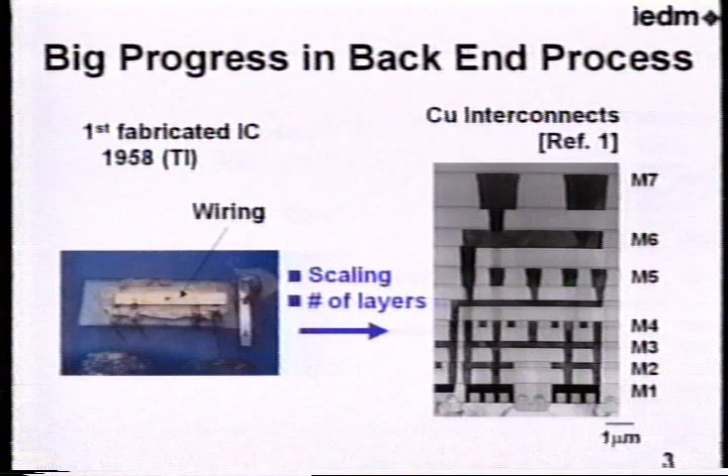This picture shows the first fabricated IC by TI in 1958. It's somewhat difficult to see where the wiring is, but you can see this wiring between the devices in the first IC chip. And this picture corresponds to present day copper low-K interconnects. As you can see from these figures, there is a drastic change in device structure over these 50 years, like a half century.

And the changes have occurred mainly in two areas. One is that the scaling of interconnect has drastically shrunk. And the other is that the number of interconnect layers has drastically increased. I'll explain this change in more detail. This figure corresponds to a multi-level interconnect in logic LSI from 0.5 micron to 0.18 micron technological node.

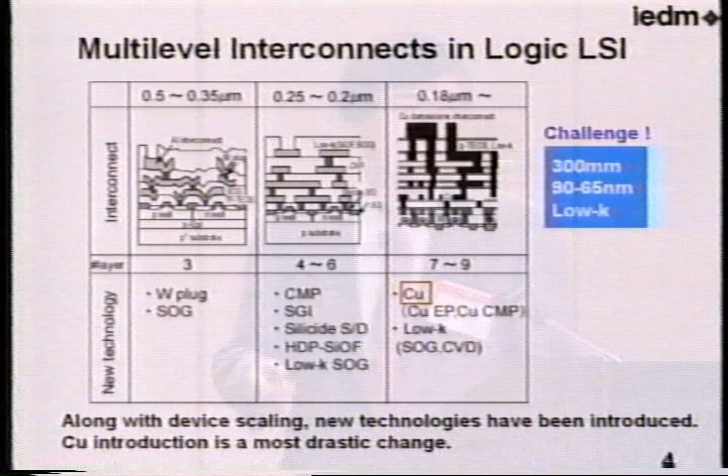As you can see in this figure, along with the device scaling, new technologies have been introduced at every technological node. There are many new technologies like this. If I explained these new technologies in detail, maybe I could conclude my talk in 6 minutes or so. But among these, the introduction of copper is the most drastic one. And now we are facing the new challenge for 300 millimeter and the 90 to 65 nanometer technological node, and the special challenge is low-K introduction.

Copper is drastic because the process of copper is completely different from the aluminum one. Copper is formed by using the so-called dual damascene method. In the damascene process, the interconnect pattern is initially formed in the oxide, and copper electroplating filling and copper CMP follow. Damascene process consists of single damascene and dual damascene process. And in manufacturing, the dual damascene process has been widely used because of fewer process steps.

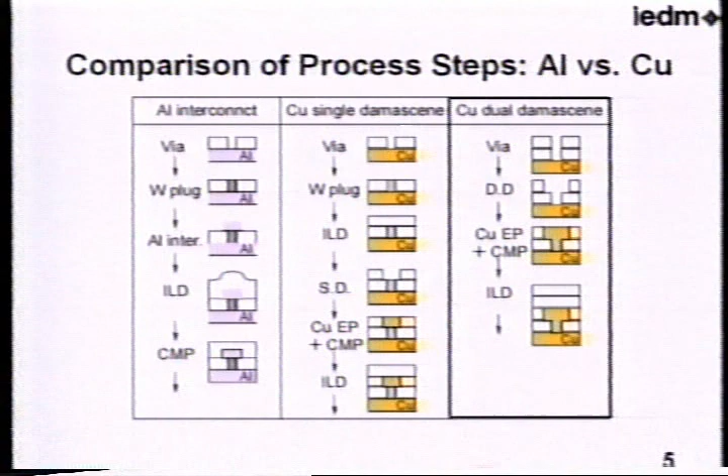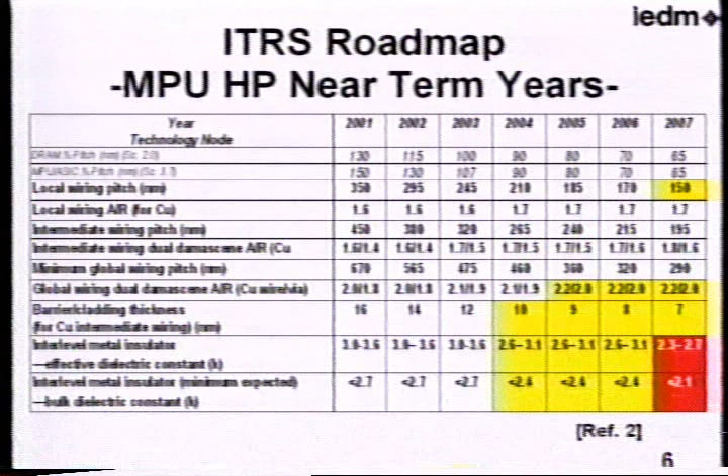This is the ITRS roadmap of 2001. As for the scaling of interconnect, it is indicated for each layer. This is local wiring, intermediate wiring, and global wiring. And also, the scaling of barrier metal thickness is indicated like this to suppress the increase of copper resistivity. And as you can see, for the introduction of low-K, you can see the red bricks here. That is standing in the way to develop a 65 nanometer technological node.

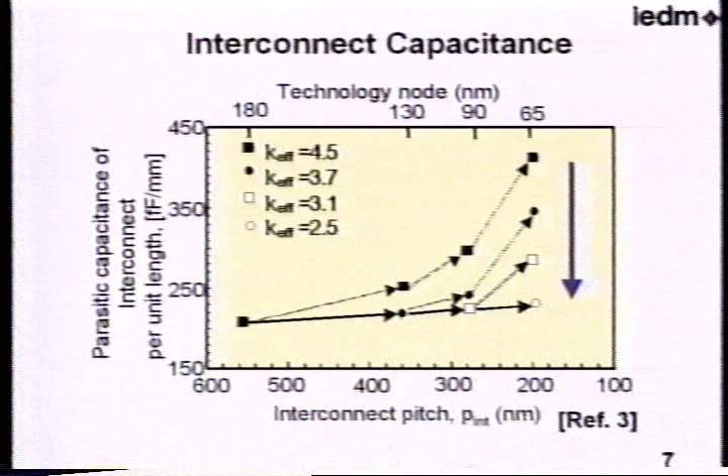This figure shows the interconnect parasitic capacitance with the interconnect pitch. In the 0.180 micron technological node, we use SiO2 ILD. In that case, K effective is 4.5. But in this case, with scaling interconnect pitch, parasitic capacitance of interconnect is drastically increased beyond the 90 nanometer technological node.

That's why we introduced the low-K. For example, for the 130 nanometer technological node, the K effective is 3.7. For 90 nanometer, we'll use the low-K with the K effective 3.1, and for 65, K effective 2.5. These values are almost consistent with the roadmap values. To adopt these kinds of low-K, we can make the interconnect capacitance almost constant for every interconnect pitch.

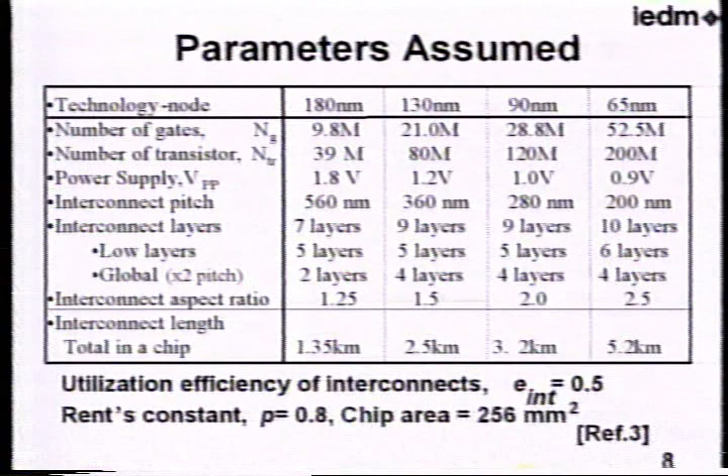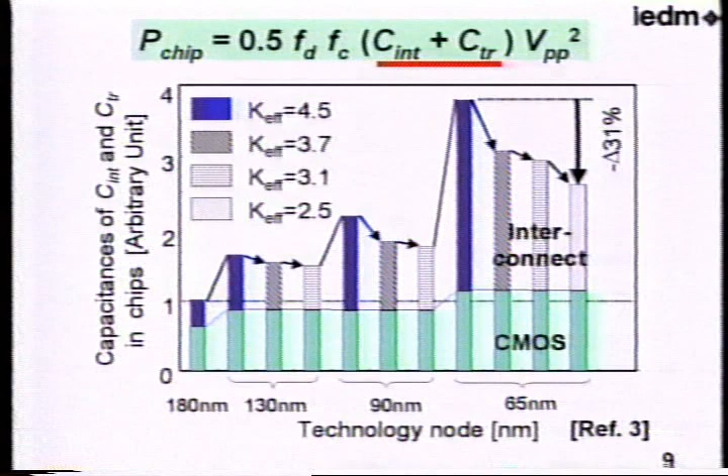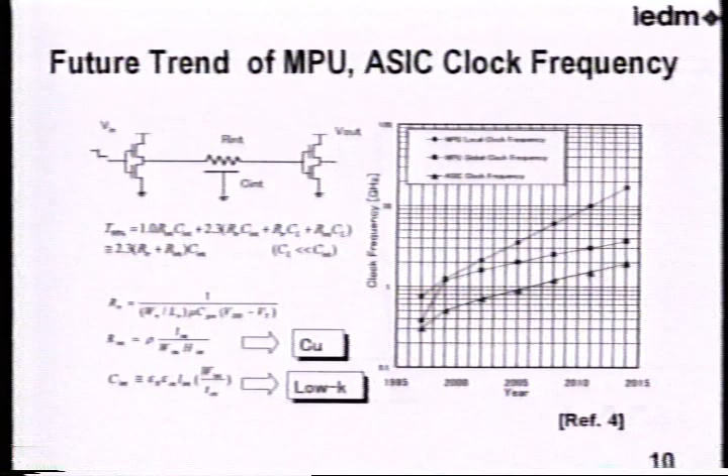Also, low K introduction is very important to reduce our RC delay. This figure shows the change of clock frequency by year. Local clock frequency of MPU is increasing rapidly like this, but the increase of global clock frequency is slow as compared with the local clock frequency due to the RC delay expressed by these expressions. Along with the low K introduction, reverse scaling of global wiring is expected to meet the high-speed operation requirement.

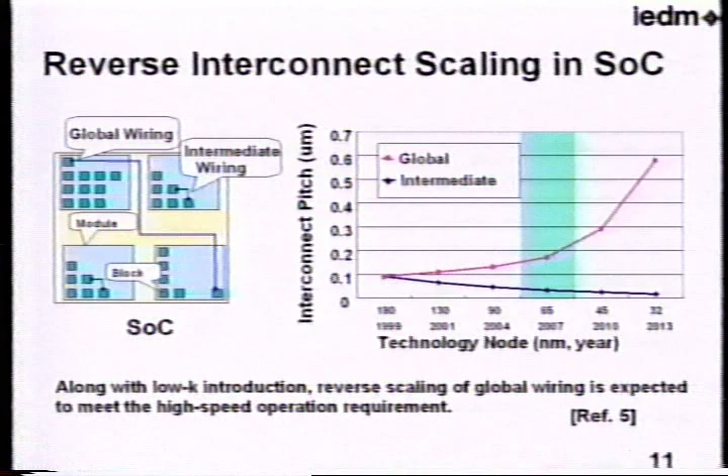This figure represents interconnect pitch versus technological node. The interconnects are divided in 3 categories. One is block wiring, and intermediate wiring connecting blocks, and global wiring connecting modules. The pitch of intermediate wiring is scaled like this. However, the pitch of the global wiring is increased drastically beyond 65 nanometer technological node. This means also the number of interconnect layers will be much increased to meet the high-speed operation requirement.

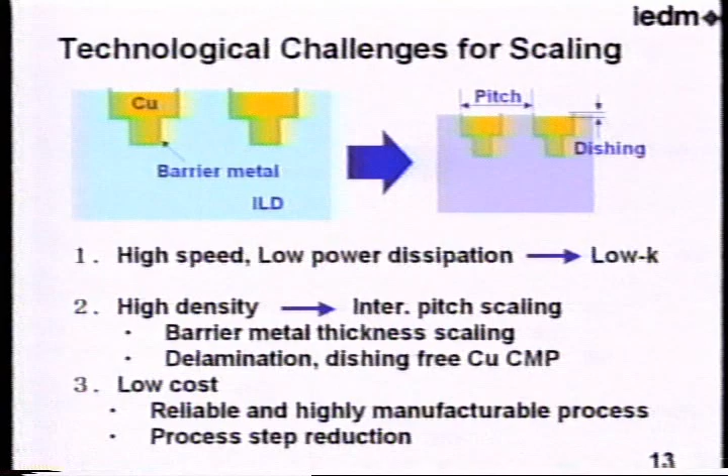Next, I'll talk about technology challenges for 65 nanometer back-end process. This figure represents the three main technological challenges for scaling. One is the low K, that I described earlier, for high speed and low power dissipation. The other one is for high density integration. For interconnect pitch scaling, barrier metal thickness scaling, and also dishing-free Cu CMP is very important to suppress the distribution of the interconnect resistance in the wafer. And cost is a very important factor for metallization, and cost determines the process, and a reliable and highly manufacturable process is required.

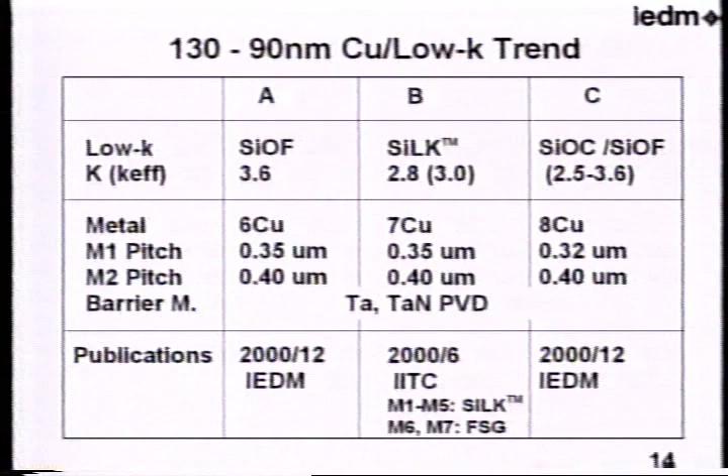As for 130 to 90 nanometer Cu low K, there are many candidates for low K material: fluorine doped SiO2, in this case the K value is 3.6, and also SiLK, which is an organic polymer, and also carbon doped SiO2 have been widely investigated for these applications. As for the barrier metals, PVD of tantalum-based metal has been widely used.

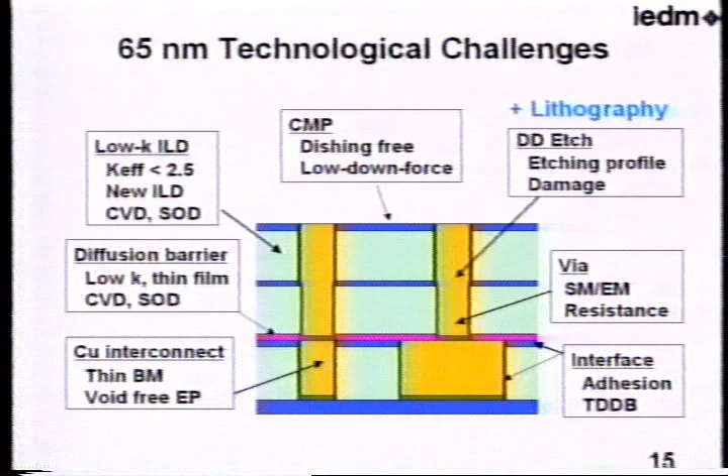This figure shows the 65 nanometer technological challenges. The first one is low K ILD, as I mentioned earlier, and the diffusion barrier that is put on the insulator above ILD to reduce the effective K values. The selection of low K thin diffusion barrier is very important. And also for interconnect scaling, thin and conformal barrier metal is needed, and void-free electroplating technology should be developed to guarantee the reliability. As for the CMP, a dishing-free process, and also to prevent the delamination or the damage of ILD, a low downforce process will be needed.

As for the dry etching, precise control of etching profile and also a damageless process to ILD is needed. In addition, the compatibility of lithography is very important. As for the via formation, the reliability of stress migration and electromigration is very important. To improve this kind of reliability problem, the interface property like adhesion is very important.

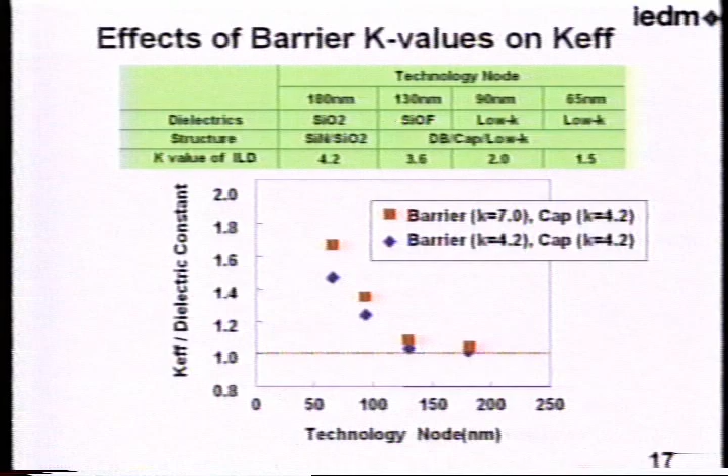The effect of barrier K value is very drastic, as shown in this figure. We assume the interconnect structure like this. As for the dielectric, at 180 nanometer it is SiO2, and in this case, the structure is nitride and SiO2. K value is 4.2, and at 65 nanometer, low K value is 1.5, with diffusion barrier and cap of low K. We use this structure, and this is the result of the calculation. The vertical axis represents K effective divided by the dielectric constant of ILD. This means below a 90 nanometer technological node, the effect of the K value of diffusion barrier and the capping layer is very important because of the big difference between normalized values.

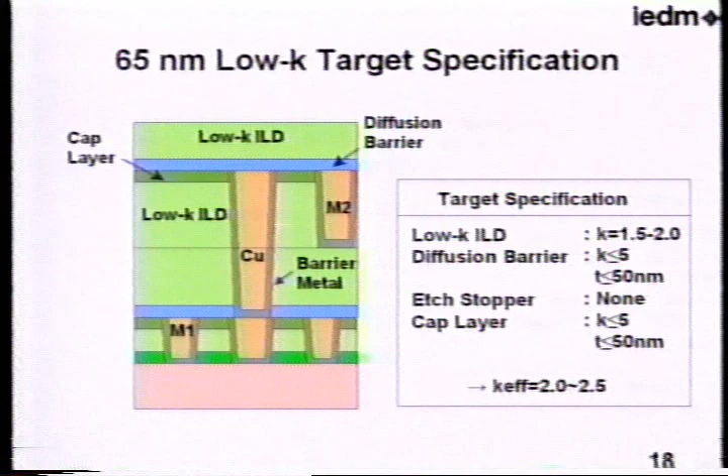I'll summarize the target specification for 65 nanometer from these calculations. This is an example of target specification. For the low-K ILD, the K value ranged from 1.5 to 2.0. For the diffusion barrier, the K value is less than 5. In this case, an etching stopper is not used. And there are similar conditions for the capping layer that will reduce the K effective value from 2.0 to 2.5.

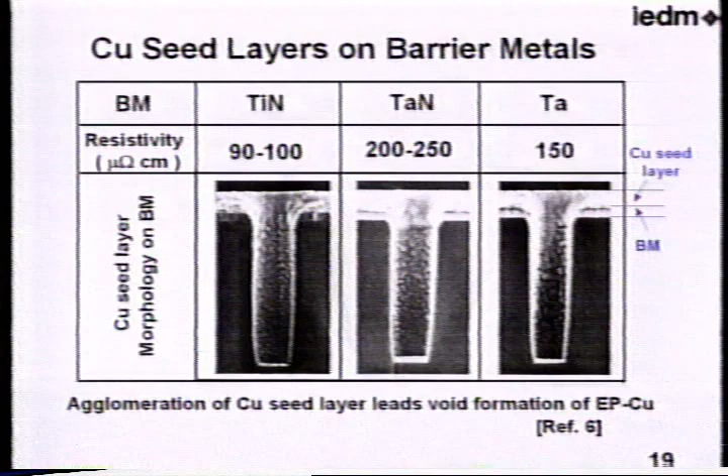I'll move to the topic of metallization, the barrier metal. This picture shows various copper seed layers deposited on various barrier metals: titanium nitride, tantalum nitride, and tantalum. All the deposition was conducted using PVD. As you can see, there is agglomeration of the copper seed layer on the side wall, and that will induce some voids when the electroplating process is conducted. Thus, a conformal and thin diffusion barrier is very important. Also, the selection of barrier metal is very important in terms of reliability via thermal stability.

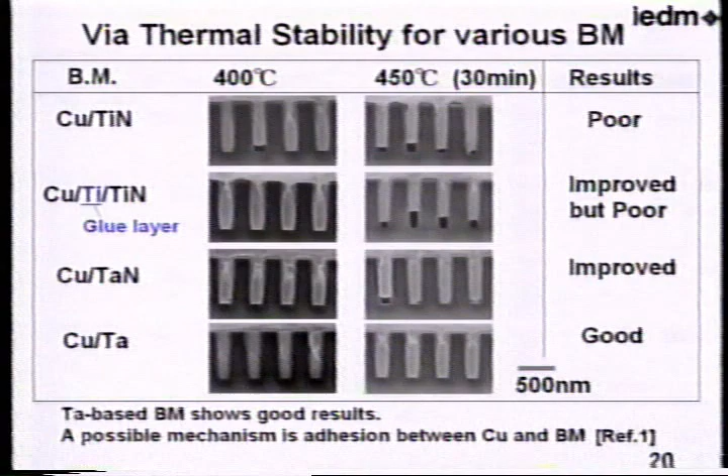These are some pictures after annealing at 400 to 450 degrees C for 30 minutes. These are the barrier structures. As for the copper titanium nitride, you can see the void after thermal treatment. And if we put titanium between the copper, as a glue layer, things are improved. But basically, if we use a tantalum-based metal, this kind of stability is much improved. A possible mechanism is adhesion between the copper and barrier metals. So the selection of barrier metal is very important, and we should also make much effort to develop conformal and thin film formations.

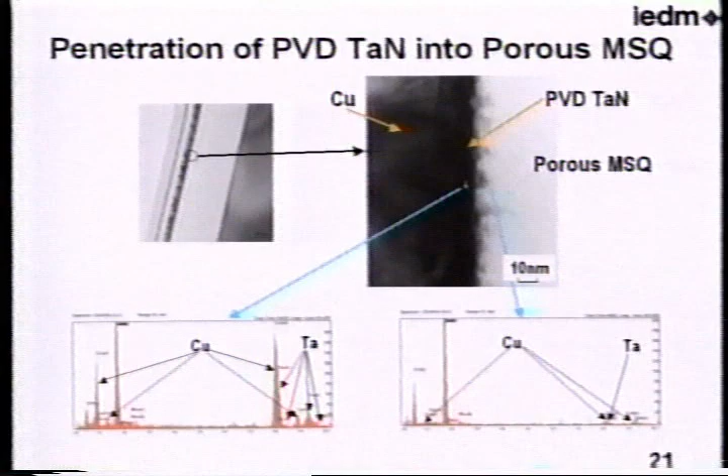But when this metal is deposited on a porous material, there are some serious problems. That is the penetration of PVD tantalum nitride into the pores in MSQ. In this case, we use this low-K, porous MSQ. You can see this unclear and shaded region in the porous MSQ. In this shaded region, you can see the copper and tantalum. This indicates that these metals penetrate into the pores in these low-K materials. So this is also a big concern when applying this metal on porous materials.

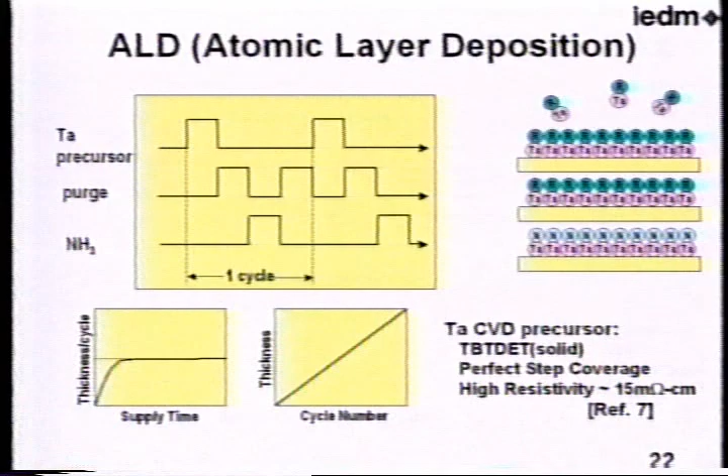ALD is a very promising candidate for conformal and thin film formation. In an ALD process, gases are introduced cycle by cycle. The precursor gas is adsorbed initially at the surface of the substrate, followed by a surface reaction to form an atomic layer of metal. In that case, the step coverage is perfect. But the problem with ALD is that it's somewhat difficult to find a suitable precursor, especially for tantalum. Of course, there are some reports on tantalum CVD precursors. It will give a perfect step coverage, but the resistivity is very high at this moment.

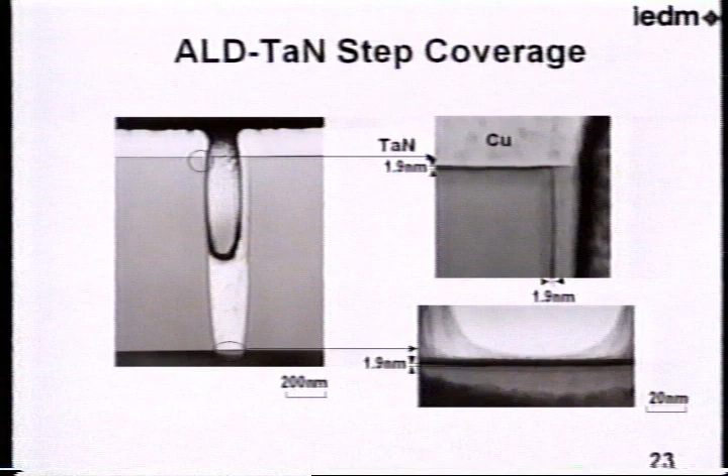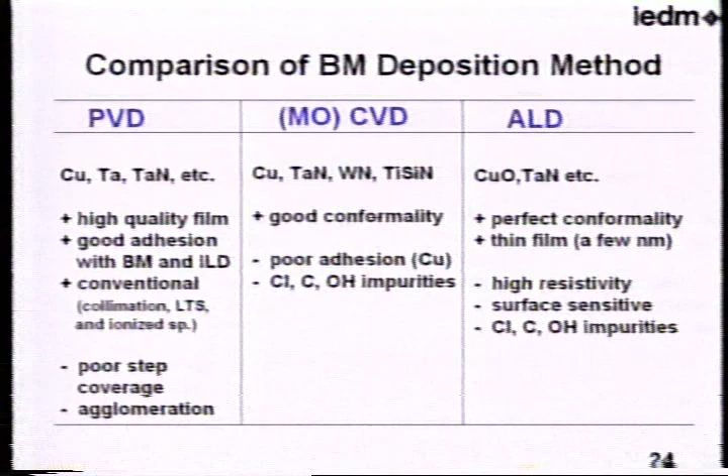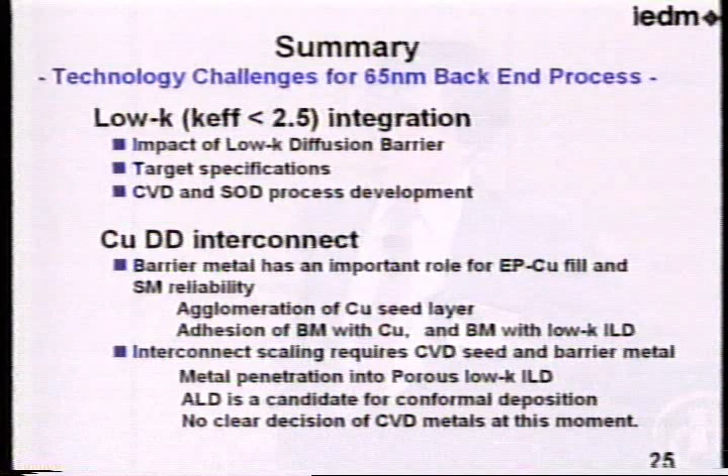This is a summary of this session. I've described low-K integration, the impact of the diffusion barrier, and target specification. For all the interconnects, in copper dual damascene interconnect, the barrier metal has a very important role. Also, interconnect scaling requires CVD metal seed and barrier metal, but metal penetration is an issue. ALD is a candidate for conformal deposition. There is no clear decision on the CVD material at this moment. Next, I'll describe new ILD materials.

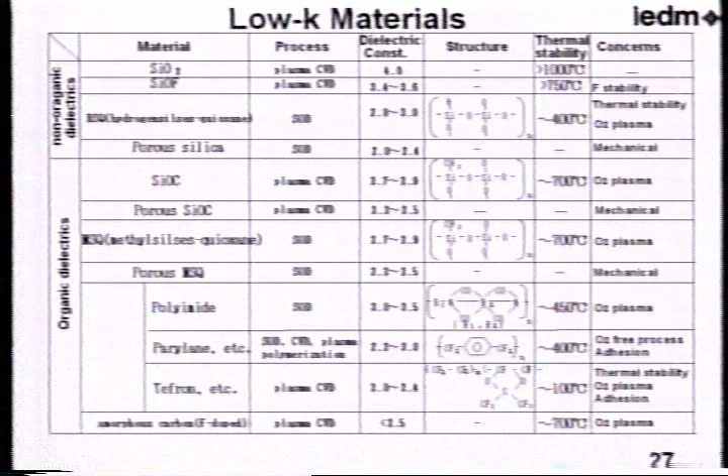For a 65 nanometer technological node application, we select several kinds of porous material and non-porous material. This table shows the structure and materials and the dielectric constant deposition method.

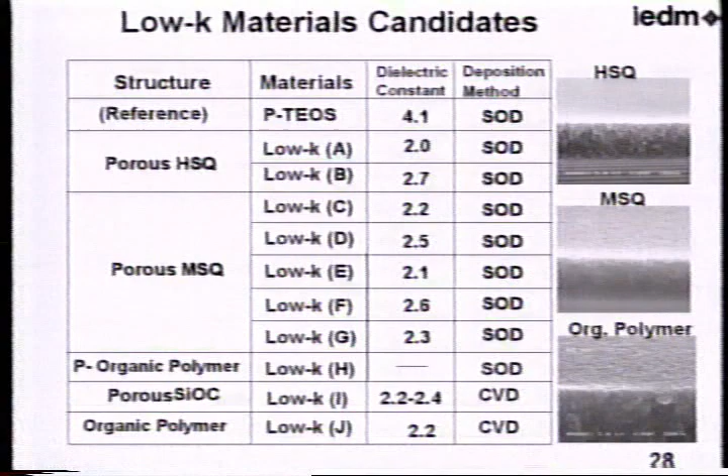At this moment, there are many MSQ because the development of porous MSQ is mainly done in SOD film, because the formation of pores is somewhat established in the SOD case, but it's somewhat difficult to make a pore in a CVD film. So these photographs correspond to the cross-section of these porous materials.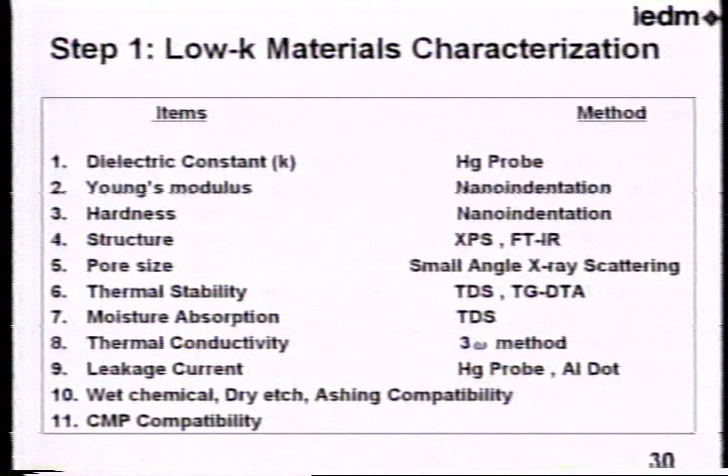This table shows typical evaluation items and methods. There are, for example, the dielectric constant, Young's modulus, hardness, structure, and pore size, and so on. These items were evaluated by using these analytical methods. First, I will describe the Young's modulus. Young's modulus is the parameter of mechanical strength of Low-K film.

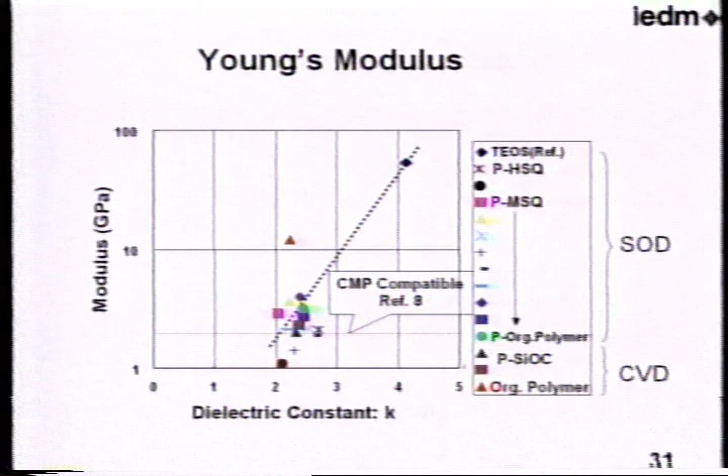This figure shows the modulus as a function of dielectric constant K. As you can see, for the Low-K film, especially porous Low-K film with a K value less than 2.5, the modulus is about 1/10 compared with the reference SiO2 film. So in that case, the porous Low-K material is very weak in mechanical strength as compared with SiO2. Note this point: this is non-porous organic polymer material, like polyethylene-based polymer CVD. In that case, the mechanical strength is high, above 10 gigapascal.

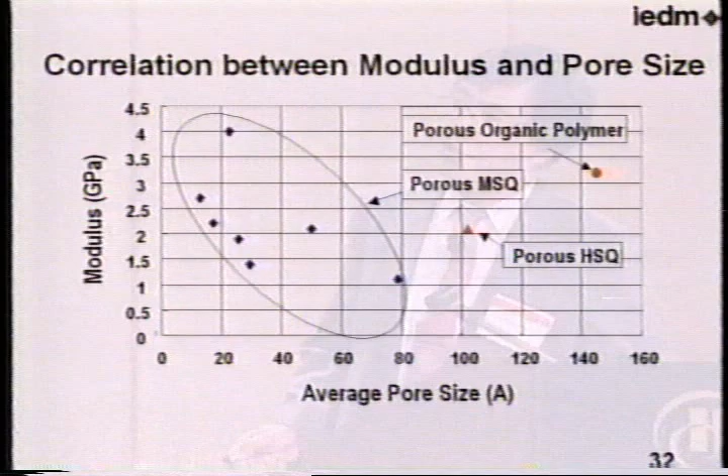And also, there is some correlation between the modulus and pore size. The pore size was evaluated by using a small angle X-ray scattering method. This is a figure of the correlation between the modulus and average pore size. There are big scatters among these materials, MSQ, HSQ, organic polymer. However, there is some strong correlation if the material is restricted to porous MSQ, like this. So, small pore size and tight distribution make the porous MSQ stronger. So it is very important to control the pore size and distribution in developing Low-K materials.

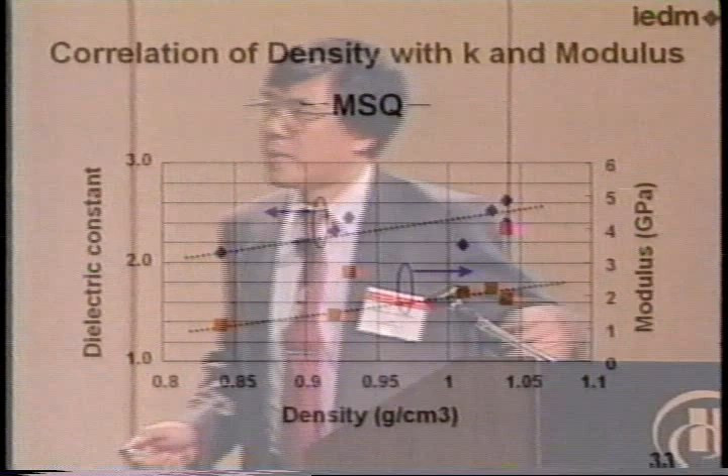And also, there is some correlation between the dielectric constant and also modulus with the density of the film. In this case, all the samples are MSQ. MSQ is as indicated in the table. This is some carbon-doped SiO2 that is formed by SOD. There is a good relation between the dielectric constant, density, and also modulus, like this.

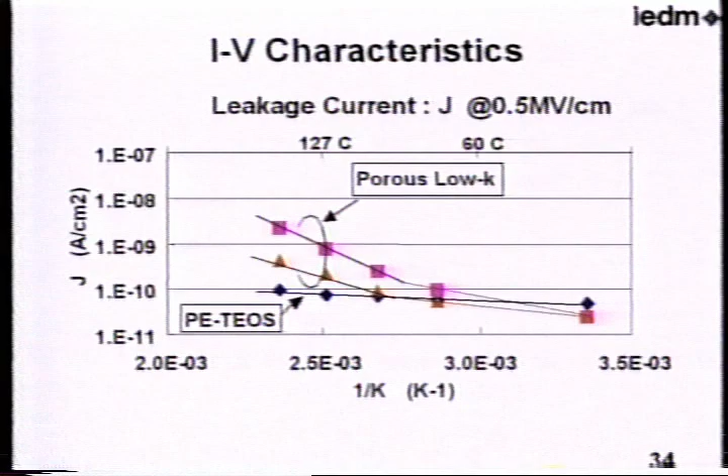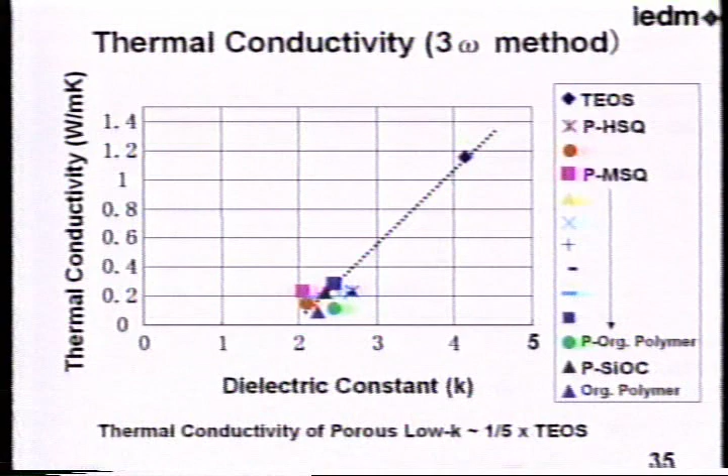And also, this is the thermal conductivity of low K film as a function of dielectric constant. The samples range from TEOS to organic polymer. As you can see in this figure, the thermal conductivity of porous low K is about 1/5 of the conventional TEOS. The thermal conductivity is also very poor. And also,

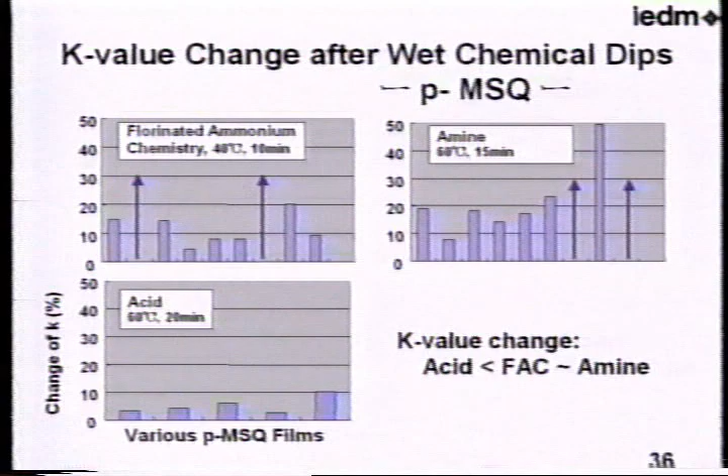we investigated damage and resistance of porous low K against wet chemicals. This wet chemical is used to remove so-called residual polymer after dry etching. We tried three kinds of wet chemicals. There are fluorinated ammonium chemistry-based chemicals, and the others are amine and acid. And we check the damage after dipping in chemicals by changing the K value, and also we check the structure by FTIR and the change of the thickness.

This is some result. We use various kinds of porous MSQ films. In general, the pH of the wet chemical is a very important factor in discussing the damage to porous low K. And in these results, the K value change is least in acid wet chemicals. So we should also develop suitable chemicals for porous low K integration.

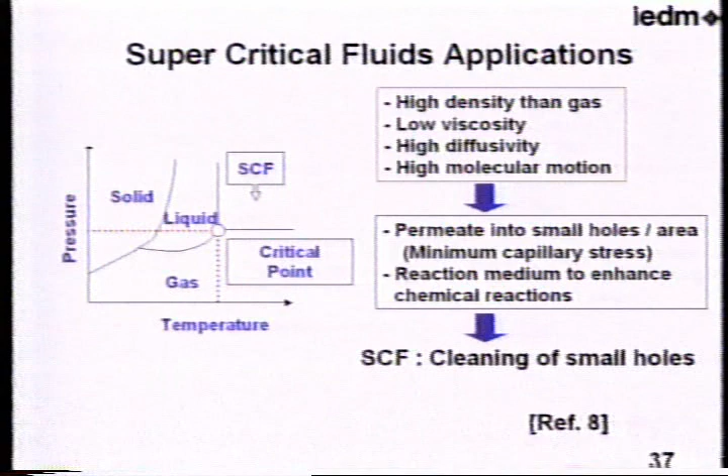And also, we tried supercritical fluid application to porous low K. Supercritical state occurs at a certain temperature and pressure. Its features are higher density than gas and low viscosity. That will cause the supercritical fluid to penetrate into small holes and act as a reaction medium to enhance chemical reactions. We adapted CO2

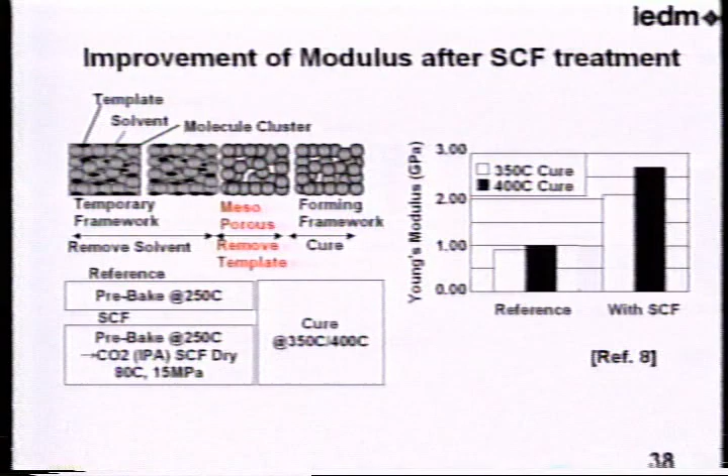supercritical fluid cleaning to a porous low K. We adapted supercritical fluid cleaning after pre-baking at 250 degrees C. And post annealing was followed at 350 degrees C. As you can see, the Young's modulus was almost twice after supercritical fluid cleaning, and this is because the supercritical fluid cleaning can chemically remove the template in the low-K film, and that will cause a smaller pore size.

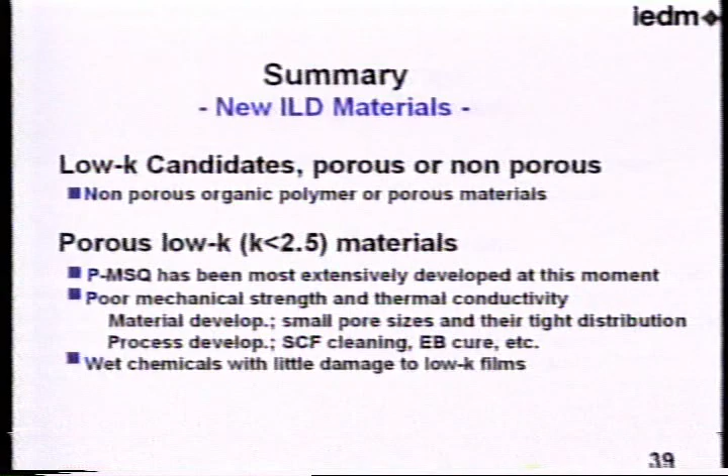I'll summarize this session briefly. Low-K, I'll talk about the low-K candidate, porous and non-porous materials. And for porous low-K materials, there are several concerns for integration. One is that porous MSQ has been extensively developed at this moment, and the poor mechanical strength and thermal conductivity is a big concern.

To improve this kind of material property, there are two approaches. One is material development, aiming at a small pore size and a tight distribution. The other one is post-process development. As I mentioned, supercritical fluid cleaning, and also in the literature, the EB cure method has been reported. And also wet chemicals with little damage to low-K film are important.

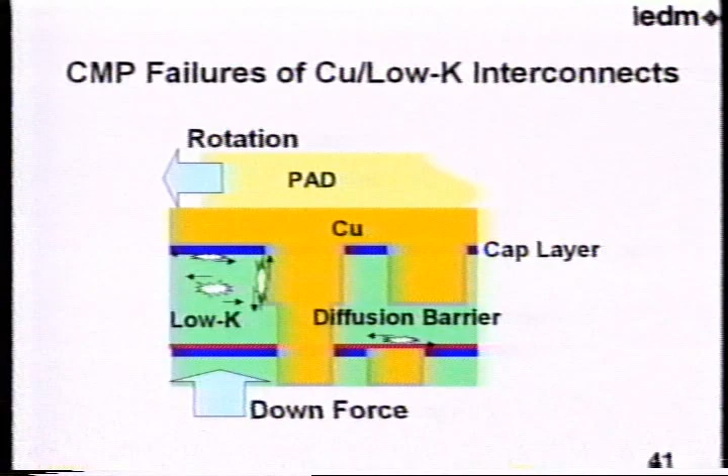Next, I'll move to our integration challenges. This picture shows possible CMP failures of copper low-K interconnect. There are metal delamination or cracks during CMP with a mechanical friction. To prevent this kind of delamination or crack in the film, we should develop a new slurry and also a new pad, and also reducing the downforce is important.

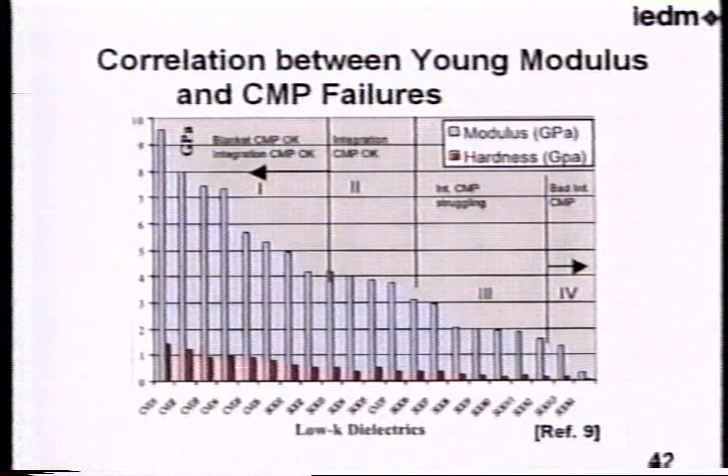This data shows the correlation between the Young Modulus and CMP failures. And this failure is strongly dependent on the sample structures, say pattern and blanket. For example, when the Young Modulus is above 4 gigapascal, the test of the pattern wafer is okay, but not for a blanket. So there is some correlation between the mechanical strength and CMP failures.

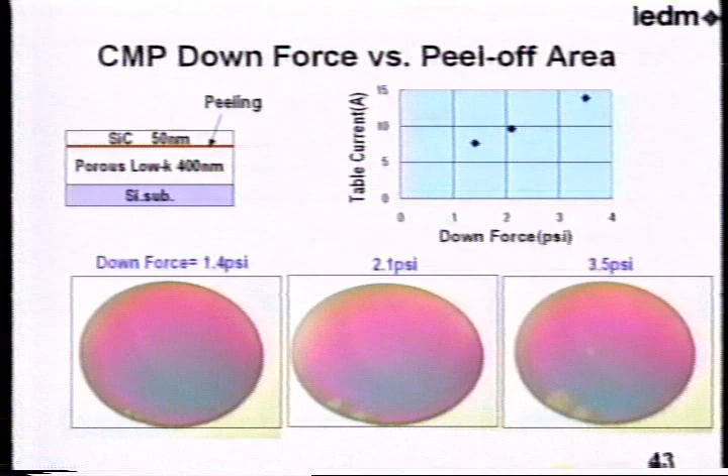And this figure represents CMP downforce versus delamination area of the capping layer. The sample structure is like this. We did this CMP experiment by changing the downforce from 3.5 to 1.4 psi. With reducing downforce, you can see the area of delamination is much reduced. And also note that the starting point of delamination is at the wafer edge. So to reduce this kind of defect, we should take care of some treatment of the wafer edge, and also this kind of process improvement.

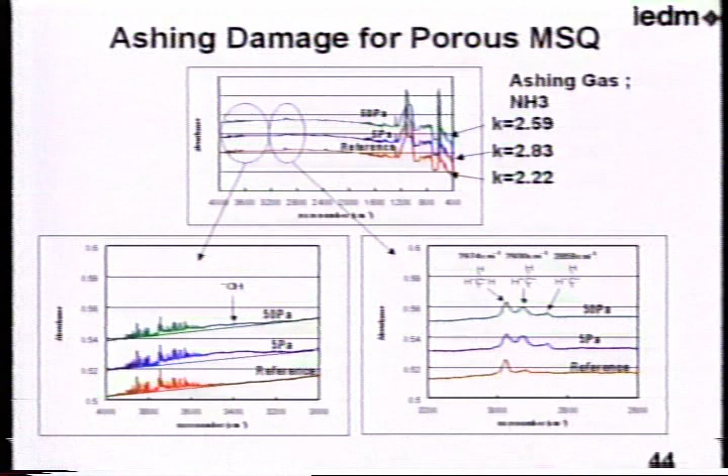And ashing damage is also a very big concern for low-K integration. This figure shows porous MSQ, FTIR spectra after plasma treatment. The sample is porous MSQ. The gas is ammonia. In that case, we changed the pressure of ammonia. As you can see in this figure, after ashing, the K value is increased much, like 2.2 to 2.5. Simultaneously, we can see water absorption in the film, and the chemical bond CH3 was broken. This is some damage of ashing.

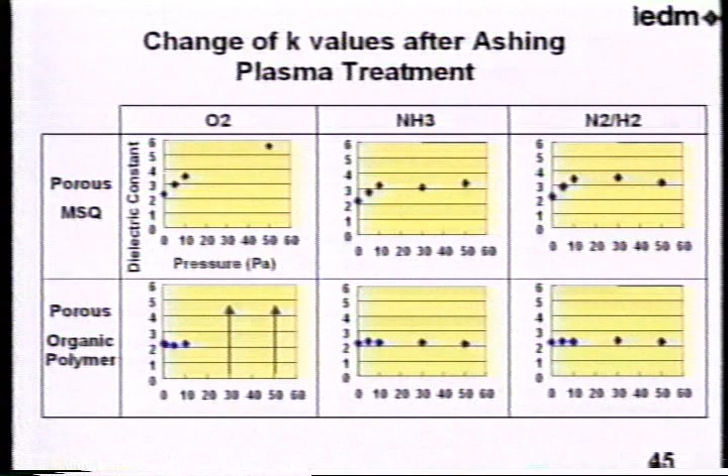So we are investigating several kinds of ashing gas against the porous MSQ and porous organic polymers. If we use oxygen, it's very bad, with a much increased K value, and the same in the case of organic polymer. If we change the gas to ammonia, nitrogen and hydrogen, the situation is much improved, but there is still some increase in K values for porous MSQ. Thus, we should improve this kind of ashing technology more to reduce this K value change. This kind of work has been done recently.

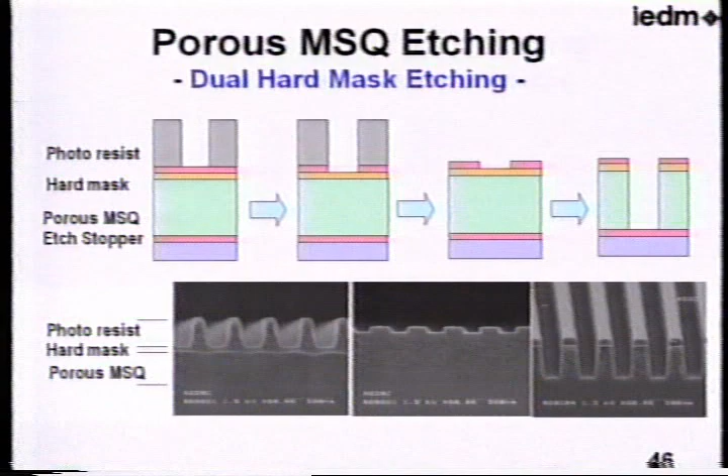As for the damage of low-K material, the lithography is closely related, to prevent the damage of dry etching. We use a dual hard mask etch. These are two mask layers put on porous MSQ. The first mask was patterned by using a conventional photoresist. Then the resist was removed in this state. The point is the low-K was protected by this capping layer from etching damage. So by using this first hard mask, we etched the low-K material. It is somewhat promising to prevent etching damage. However, this process is very complicated, and it will increase the cost of the process. So it is somewhat of a trade-off. So along with this kind of approach, the conventional single resist process should still be investigated.

Recently, there is some progress in the integration of porous low-K MSQ. A K value of 2.2 was demonstrated at the last VLSI symposium. In that case, an SOD film with a K value of 2.2 and a 6-level copper interconnect were demonstrated. And the breakdown electrical field between coppers is almost similar to the conventional process. So there are many problems with porous materials, but this kind of integration work has recently progressed much.

This is the future work. And also, if we adopted porous low-k, packaging is very important topics. Concerns are mechanical failure by gold and aluminum bonding and also thermal stress. And how about the compatibility with emerging packaging technology like BGA, CSP, flip chip, or SiP?

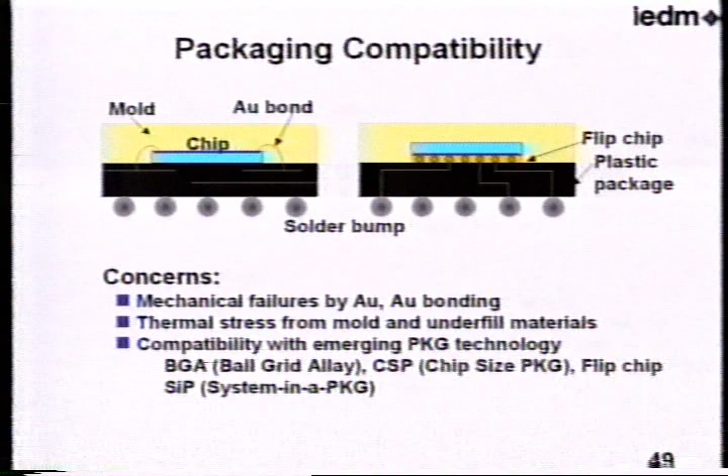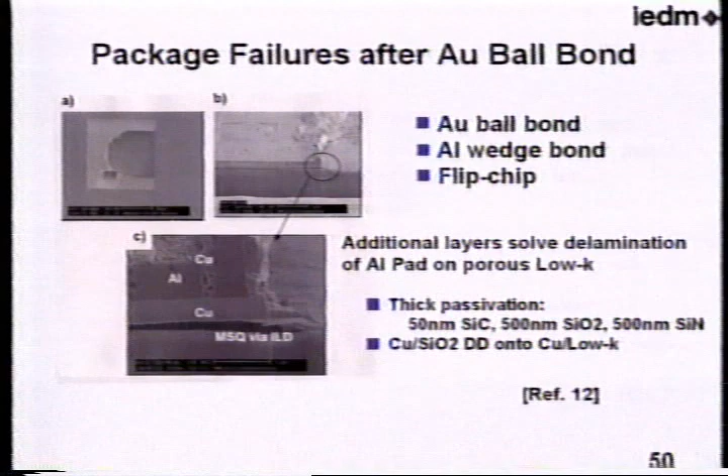This reports the package failures after gold ball bonding. They are checked. This is the SEM data. They are investigating gold ball bond, aluminum wedge bond, flip chip bonding. This is the site of packaging failure. It's the same place. As you can see, there is some delamination between a copper and MSQ like this.

And in that paper, they said additional layer solve the delamination of aluminum pad on porous low-k. They are thick passivation onto low-k film. In that case, the other is also a copper SiO2 dual damascene structure onto a copper low-k process. By adopting these two approaches, the packaging failure was much improved. I'll summarize this section.

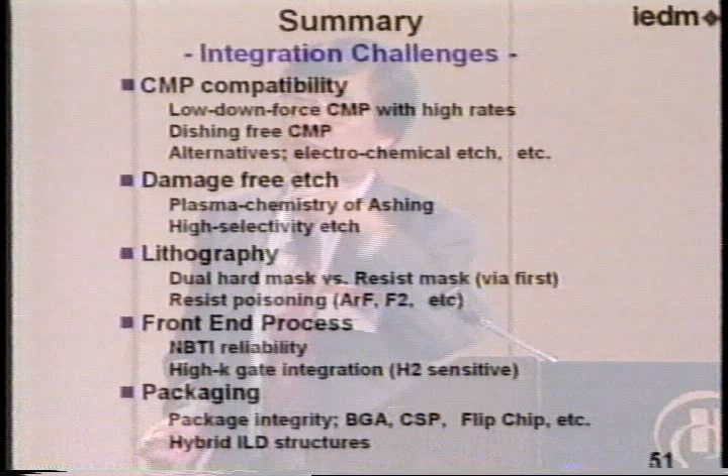Integration challenge. I'll discuss about CMP compatibility and low-down-force CMP with high rates. And also, damage-free etch is very important. I'm discussing about the plasma chemistry of ashing and also high selectivity etch. As for the lithography, dual hard mask and resist mask, the trade-off problem I discussed. And the important thing is also the resist poisoning problem. As you know, there are ArF lithography. There is some big resist poisoning problem, but we are not sure about the next generation lithography, F2 or other electron beam. This is also very important topics.

As for the front-end process, NBTI reliability I've discussed. In addition, this kind of reliability, if we adopted high-k integration, high-k is very sensitive to hydrogen. Also, this is very big topics to be investigated. As for the packaging, we discussed just for a BGA or a flip chip. These kind of investigations are now undergone. Then I'll move to a reliability problem.

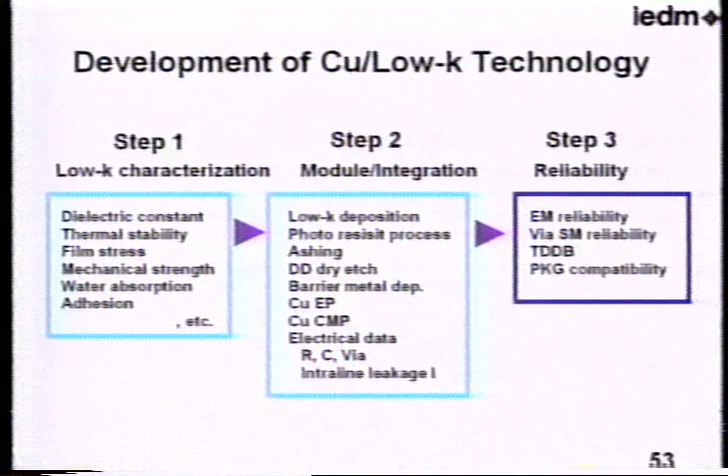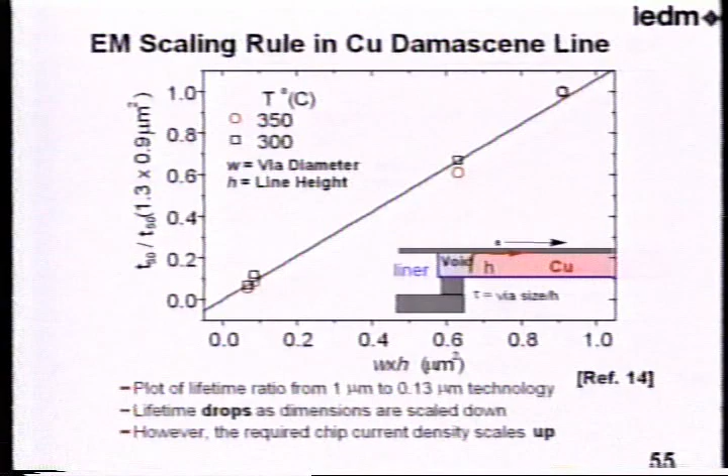And also, this figure plots the ratio of the median electromigration lifetime divided by the lifetime of the wide line, where the interconnect area is 1.3 by 0.9 micrometer squares. As you can see, if we plot this kind of lifetime ratio as a function of interconnect area, it's interesting, it is proportional like this. This means lifetime drops as dimensions are scaled down. And also, this lifetime is proportional to the area of this copper interconnect. That indicates this mechanism of this failure is the interface copper diffusion. So the problem is the required chip current density scales up while the electromigration lifetime decreases with scaling. This is some big issues.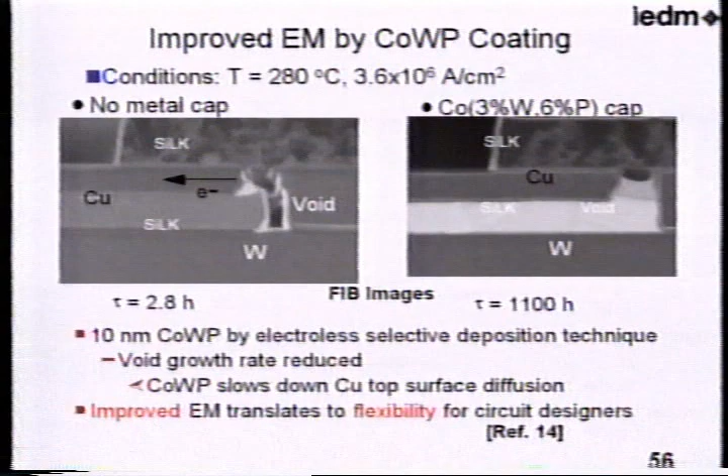To improve electromigration, some capping coat on the copper is effective because if we put some capping layer onto a copper interconnect, that will prevent the copper diffusion at the boundary surfaces. So in that case, cobalt, tungsten, phosphorus film was deposited by electroless selective deposition technique. And these pictures correspond to the failure mode. This case is no metal cap, and this is a cobalt cap samples. So this kind of improvement of a copper interconnect and also the impurity addition is effective to improve electromigration reliability.

Next, I'll talk about stress migration voiding reliability problems. This figure shows a failure of the via chain's failure rate against the width of interconnect. As you can see, if the line width is bigger than 3 micron, the failure rate was much increased, like this. And also, it has a dependence of via diameter. And you can see in this failure, you can see a void at the bottom of copper interconnect. And very interesting thing is that this kind of failure has a strong temperature dependence. The failure rate has a maximum at around 150 degrees C.

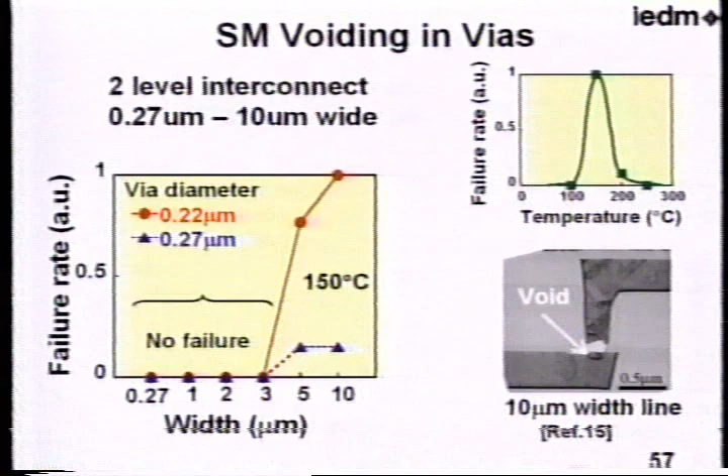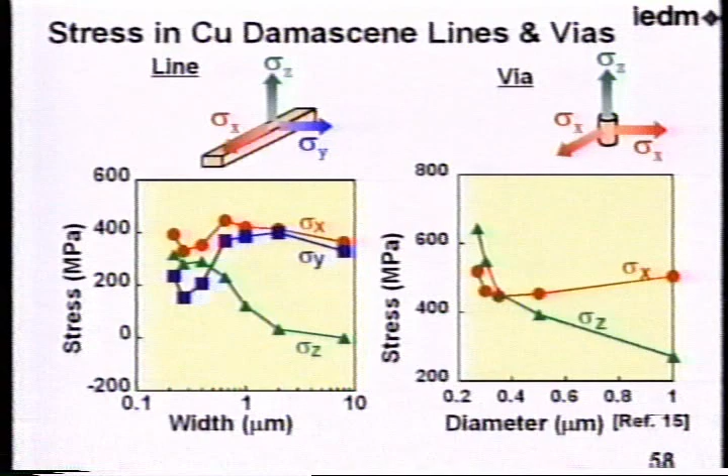To explain this kind of voiding failure, they measure the stress of copper lines and vias by using the X-ray diffraction. This is some result of stress and width, and also the stress as a function of diameter. The stress is divided in a Z component and X and Y component. And as you can see in this figure, there is very unique dependence of stress as a function of width and also as a diameter.

Stress migration formation is related with the Z component of sigma of via minus Z component of line. So in that case, you can see these experimental results can explain why in the wide lines SM void failure has occurred.

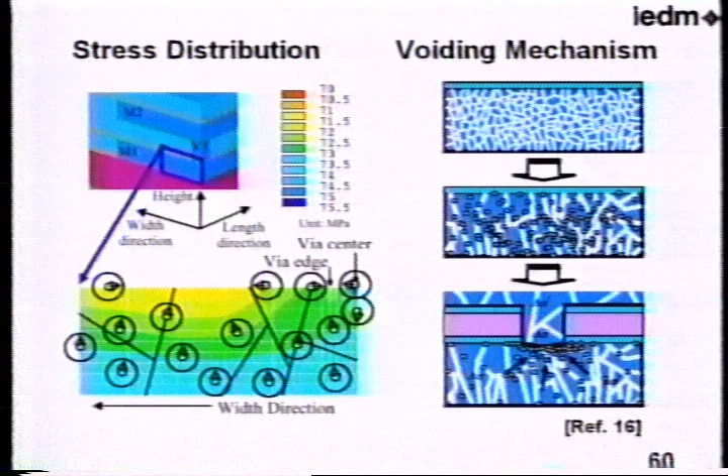I think this stress migration reliability is caused by the stress distribution of the metal like this. The first, this is the electroplating copper film. After some heat treatment, the grain growth is proceeding like this, but there are many defects like this. In the thermal treatment, these defects accumulated at an interface between via and line will make some void in lines. So there is this kind.

I spent some time to explain this kind of stress migration problem because this reliability is very, very serious at this moment from the manufacturing point of view. So in this IEDM, there are lots of papers. And also there are several kinds of mode. But the only thing we can understand is, anyway, this is related with stress and the temperature. The other one, I'll explain, is the TDDB reliability of ILD.

Also, this is very serious for interconnect scaling. The fast copper diffusion under bias temperature stress was reported in 1985. To prevent this kind of fast copper diffusion, we put a good barrier around the copper, like tantalum nitride and capping SiN. But the problem is not completely solved by using cap layer and barrier metal. Because at this moment, the breakdown point is not between the lines, but the interface between a copper capping layer and ILD.

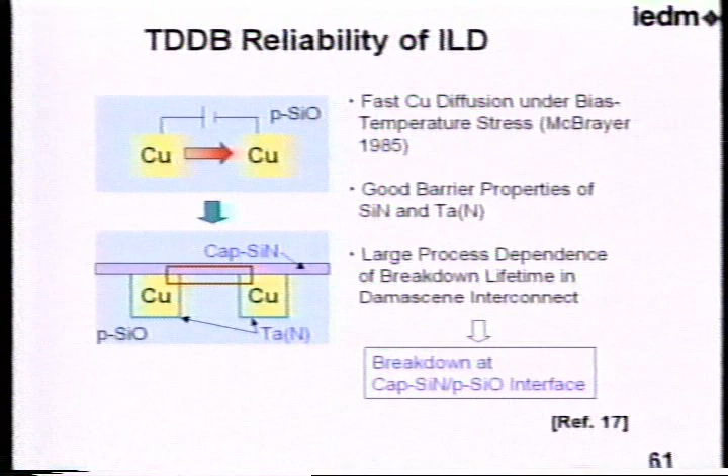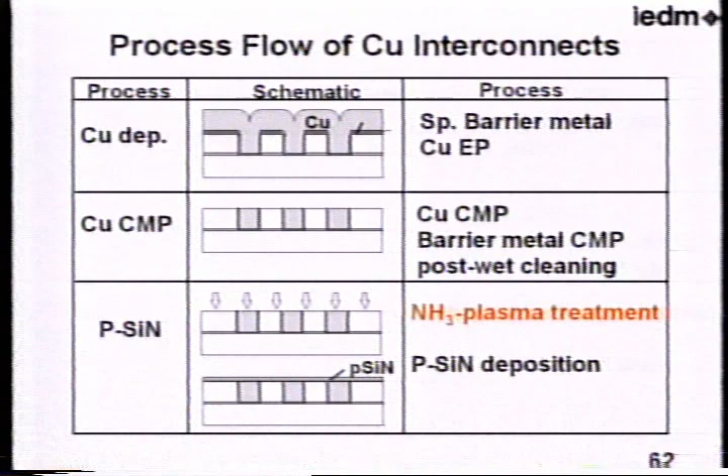For example, this TDDB lifetime is strongly dependent on process condition like this. For example, this is a process of copper interconnect, copper deposition, followed by a copper CMP. Then we conventionally do some plasma treatment to make a good adhesion between a capping layer and ILD. We typically use an ammonia plasma treatment. This removes some contamination on ILD and also reduces the copper oxide surface. This kind of ammonia plasma treatment has a strong effect on TDDB lifetime breakdown like this.

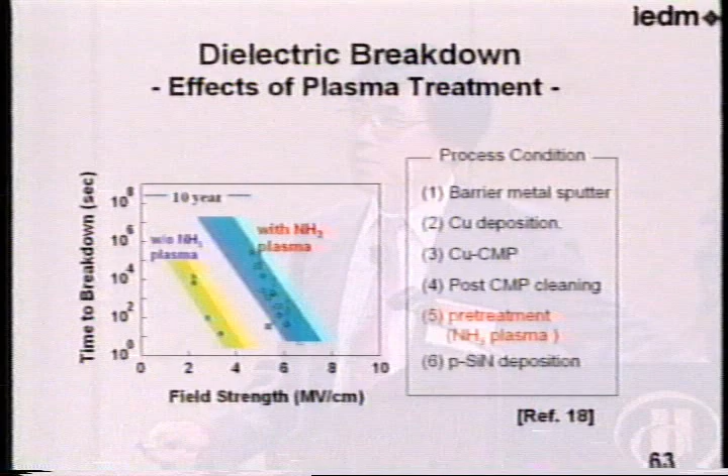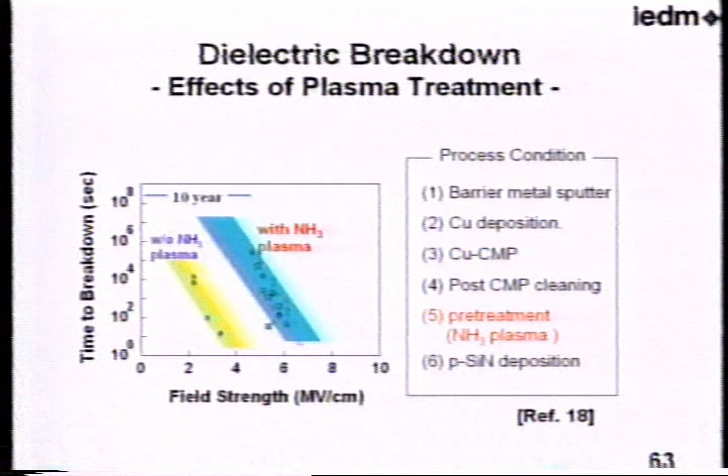This figure shows the time to failure of TDDB as a function of field strength. This is 10 years. We should guarantee this criterion. As I mentioned, we did a pre-treatment by using ammonia plasma like this. But note that the lifetime was improved by almost five times in order of magnitude by this kind of plasma treatment. This result implies TDDB is governed by the interfacial diffusion of copper, not the bulk copper diffusion. So it's very important to improve this kind of interfacial properties with the copper interconnect scaling.

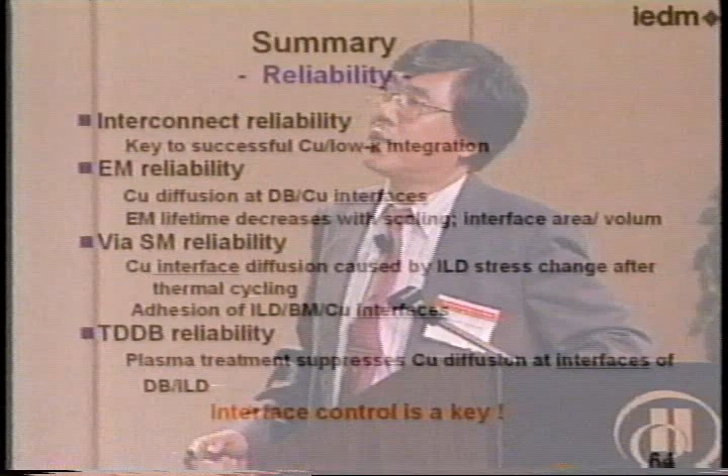I'll summarize the reliability section. Interconnect reliability is key to successful copper low-K integration. For EM reliability, the lifetime decreases with scaling. As for the SM reliability, copper interface diffusion caused by ILD stress change after thermal cycling is an origin for this reliability issue. Therefore, the adhesion of ILD, barrier metal and copper interface is very important. As for the TDDB reliability, plasma treatment is very effective.

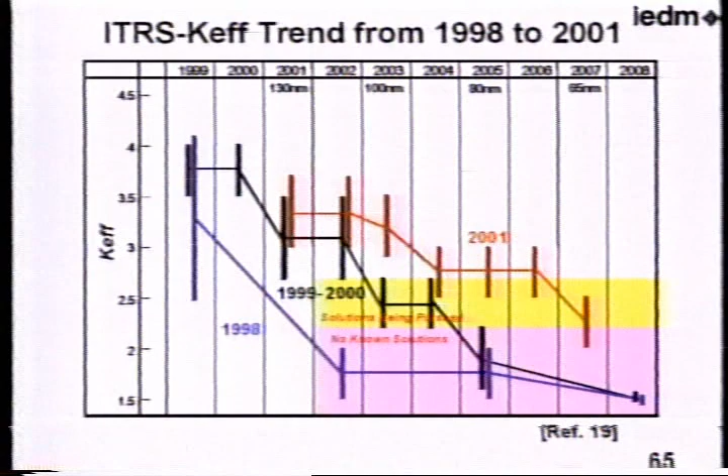Finally, this shows the trend of K effective in the ITRS roadmap. As you can see, in these 3 years, the introduction of low K is much delayed, like this. In '98, this blue line. At this moment, the latest version is like this. So the background of this delay of low K introduction is mainly due to some reliability problems associated with copper scaling. In that sense, a copper process is very effective to improve the device performance, but it is not mature from a manufacturing point of view.

So if we introduce a porous low K into the copper low K process, much work on the physics and the mechanism of this kind of failure is indispensable to make this kind of copper low K technology into the manufacturing process. But great progress has been made recently. Maybe as you can see this progress in this IEDM.

I'll summarize my talk. Low K is very important for high speed and low power dissipation. The porous materials will be inevitably introduced to reduce to 65 nanometer. They have fundamental issues to be solved. Along with interconnect scaling, the via scaling also will push the technology to be combined with the packaging. Reliability issues with new ILD K have greatly delayed the low K ITRS roadmap, but the final decision for low K depends on cost. So a clever solution is very important to introduce low K materials in production. Thank you very much.